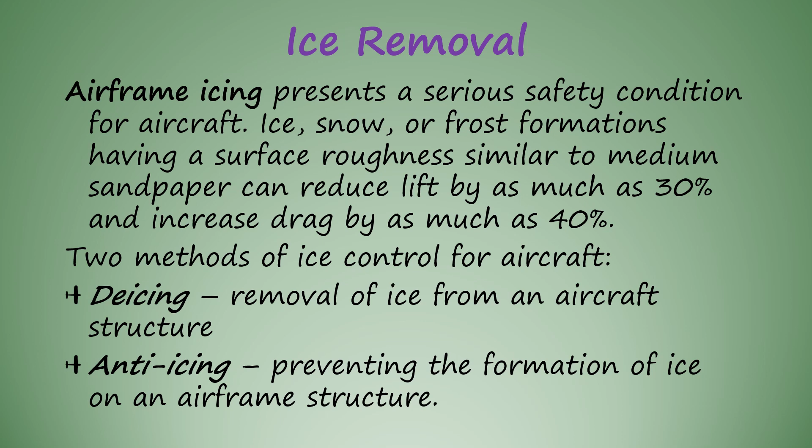A qualified person must be in the cockpit to operate the brakes when towing larger aircraft. Using only the brakes of the towing vehicle to control the aircraft can result in damage to the aircraft structure and overwhelm the brakes of the smaller tow vehicle.

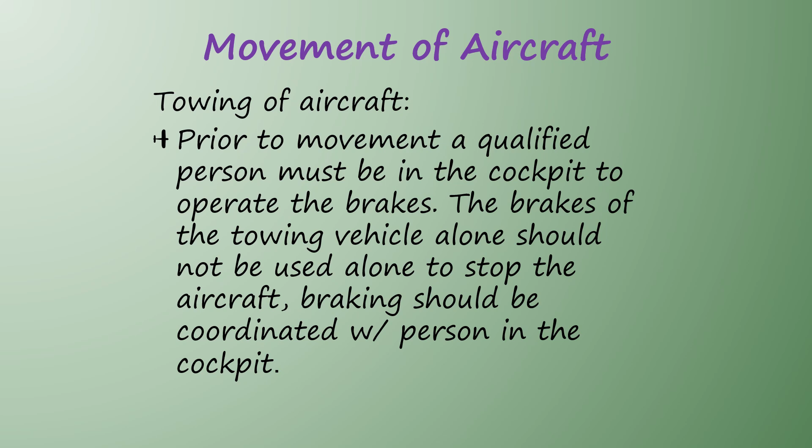When towing an aircraft, a wing walker should be stationed at each wingtip, and prior to any movement of aircraft across runways or taxiways, contact the control tower for clearance.

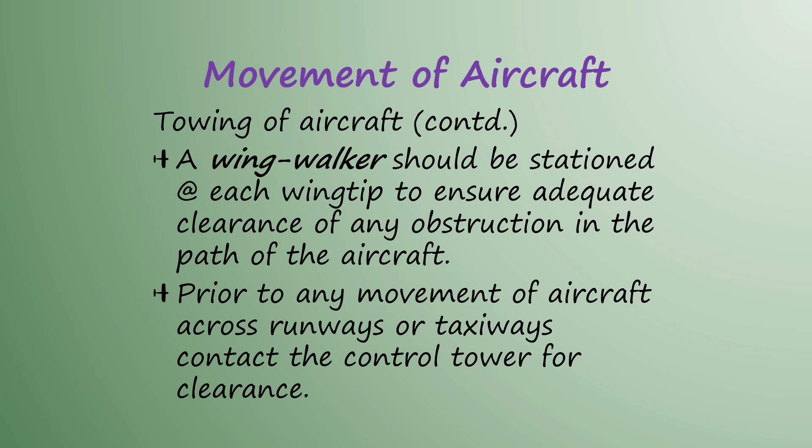When towing an aircraft with a steerable nose wheel, the locking scissors should be set to full swivel. Persons stationed in the aircraft should not attempt to steer or turn the nose wheel when the tow bar is attached to the aircraft.

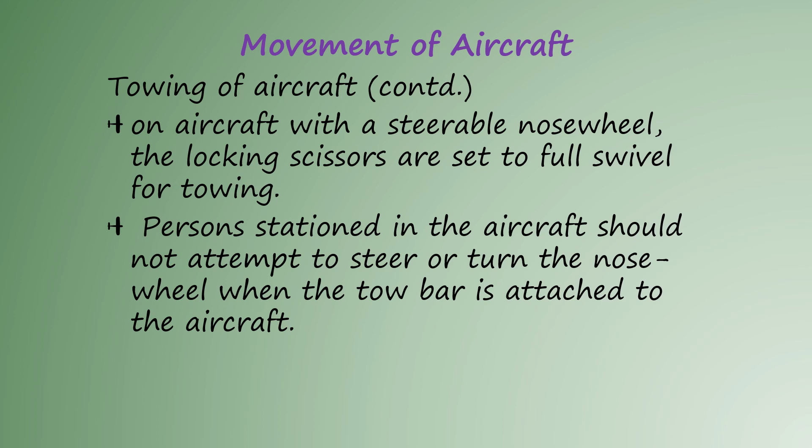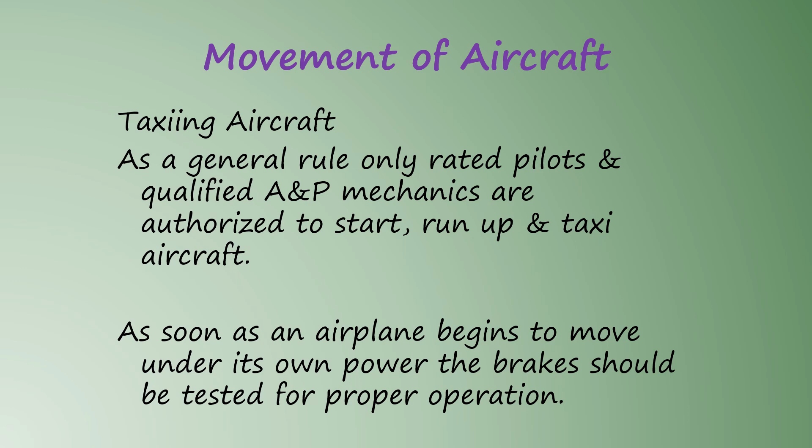As a general rule, only rated pilots and qualified A&P mechanics are authorized to start, run up, and taxi aircraft. As soon as an airplane begins to move under its own power, the brakes should be tested for proper operation.

The taxi signalman and pilot should be in clear view of each other.

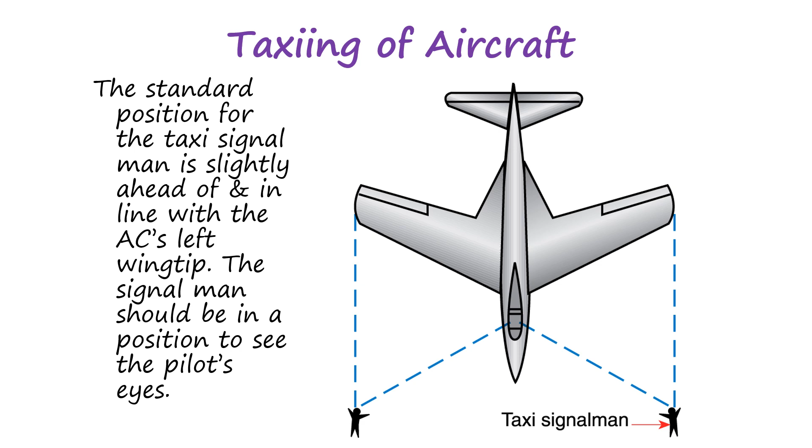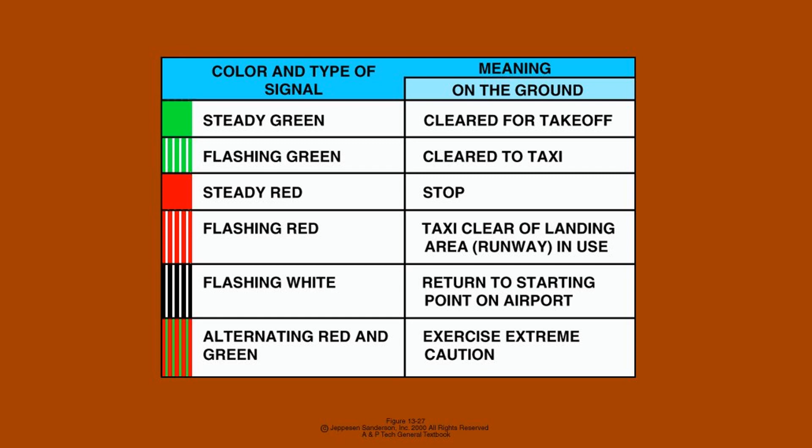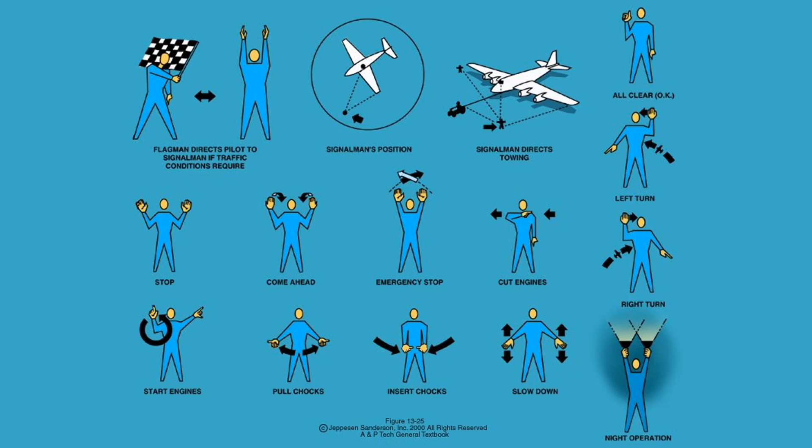By means of hand signals, a signalman can communicate instructions to a pilot while on the ground. A different set of hand signals is used for communicating with helicopter pilots.

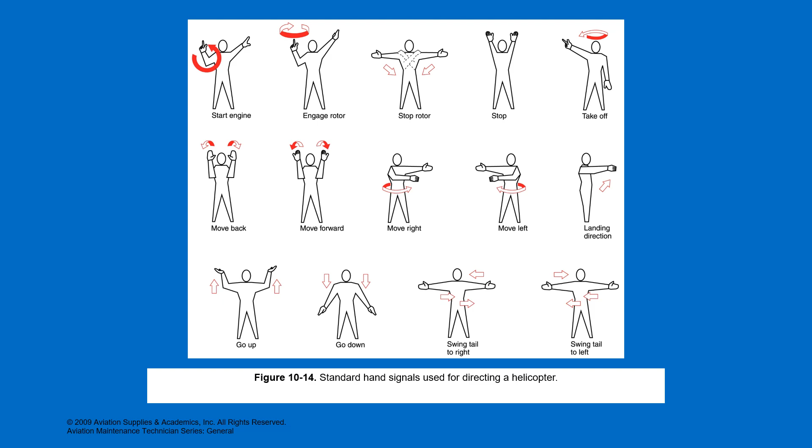When taxiing an aircraft, the pilot must always be conscious of the direction of the wind relative to the aircraft and compensate with the proper control surface deflections. Failure to do so can result in the plane tipping on its nose or a wing, causing extensive and expensive damage.

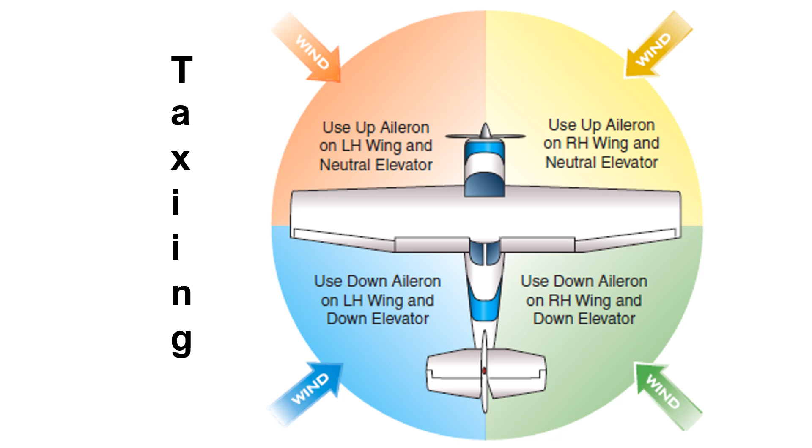Weathervaning can cause a loss of control of the aircraft and again cause substantial damage.

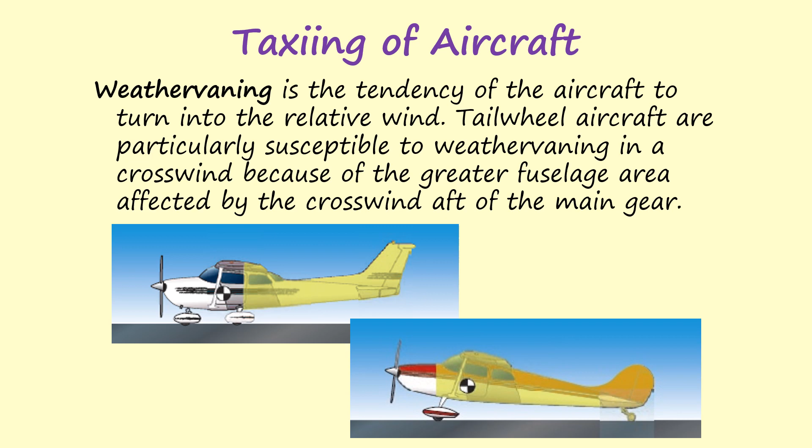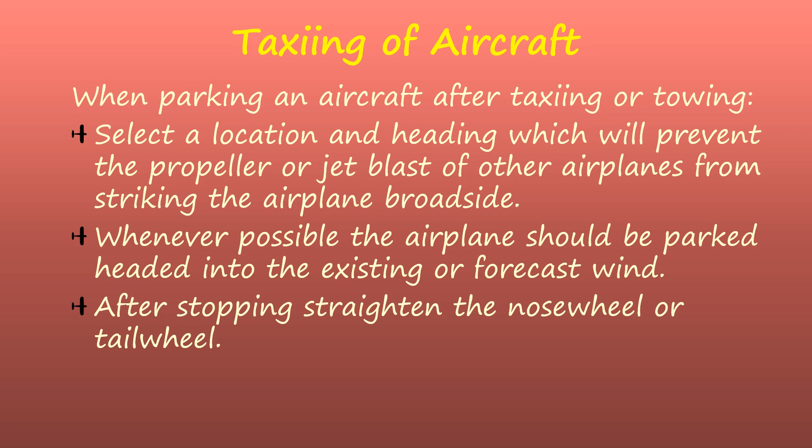There are some important factors to consider when preparing to park an aircraft. Nylon or Dacron tie-down ropes are preferred for use in securing an aircraft on the ramp.

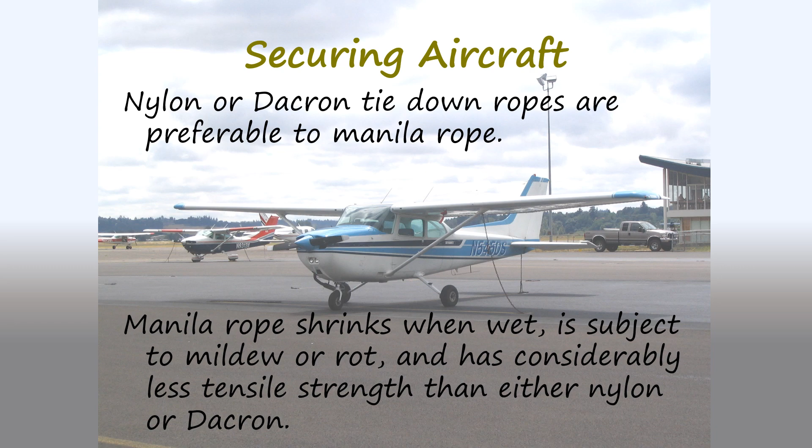To prevent damaging control surfaces, they should be locked when strong winds are forecast.

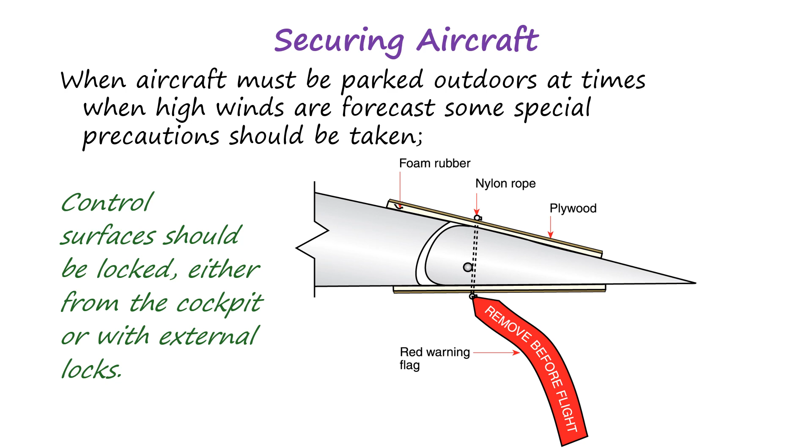When tailwheel aircraft are tied down facing into the wind, the elevator should be secured in the full up position to prevent the tail section from being lifted by the wind and repeatedly slammed back to the ground.

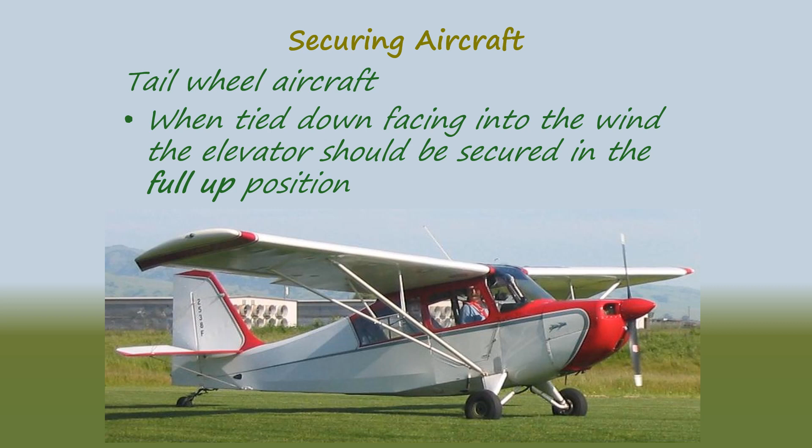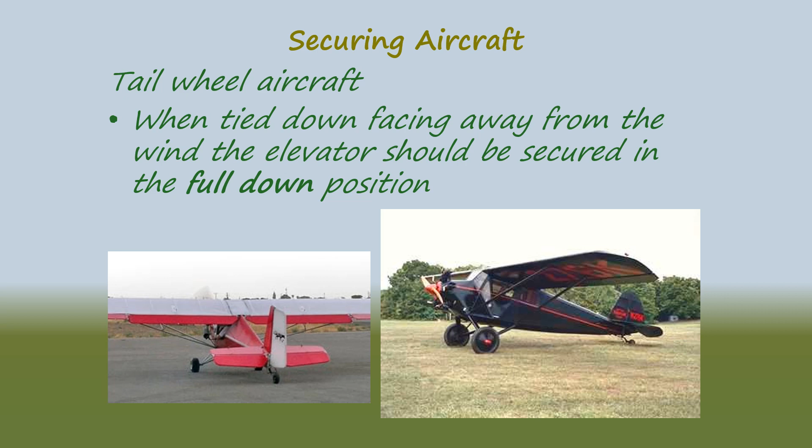For a similar reason, when tailwheel aircraft are tied down facing away from the wind, the elevator should be secured in the full down position. And tricycle gear aircraft should always have their elevators secured in a neutral position.

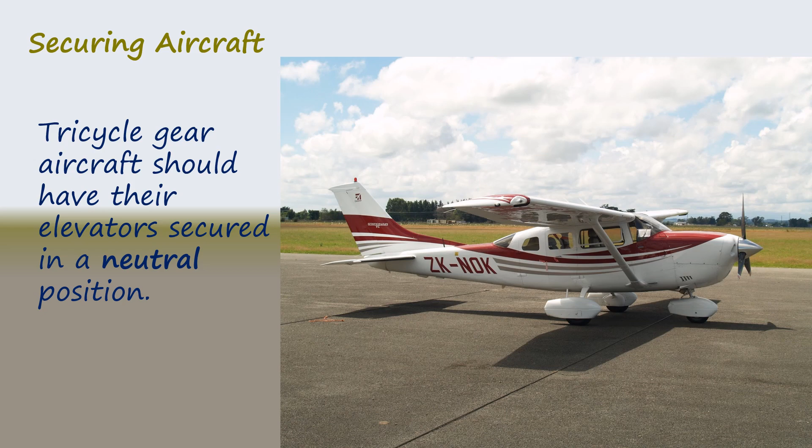Servicing oxygen systems requires a number of specific precautions.